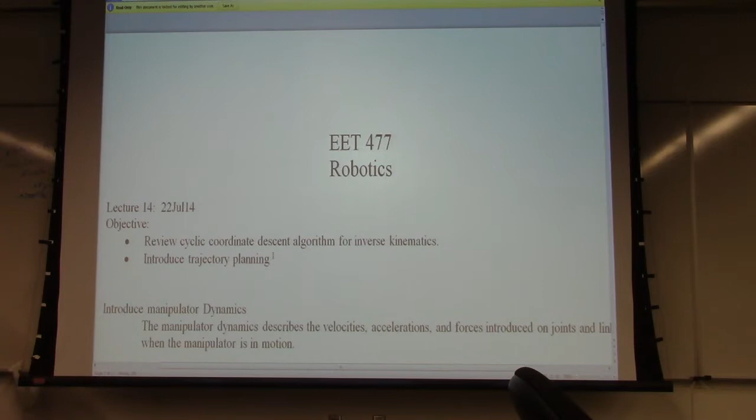I've already done that. So what we're going to do is update the objectives. Today we're going to go through and look at the dynamics of our system, and in introducing our dynamics we need to kind of have an idea of what we're talking about. Anytime we're talking about the dynamics, we're looking at the manipulator in motion. We've already kind of seen this in the second part of Lab 4 when we were planning that motion from point A to point B. That was a dynamic behavior of the robot.

If we think about it, what do we have on that end effector, or on any of the joints or segments? Obviously we have motion, and therefore, since we have motion, we have velocities, accelerations, and in a physical system, forces. Okay, and those are the 3 primary things we're interested in when considering the dynamics. We're going to be looking at the velocities, accelerations, and forces associated with this. That's something we haven't looked at at all up until now, because kinematics is all about looking at the state of the system without consideration to the forces that cause that behavior to occur.

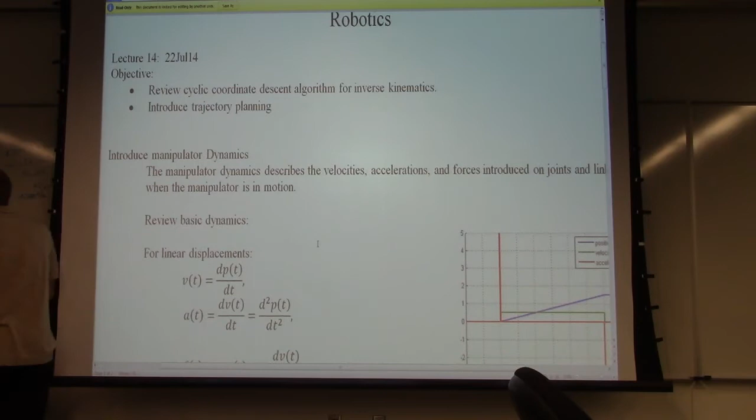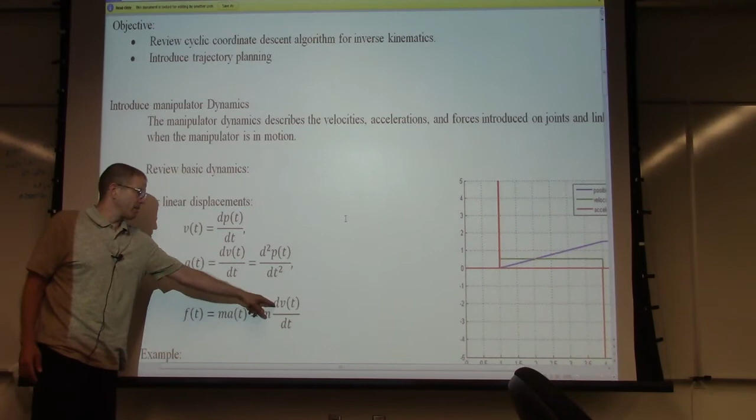Okay? So if you recall from your physics class, I'm not quite sure where everyone is, we can say a couple things. We can say that velocity is nothing more than the change in position over some time interval. We can say that acceleration is nothing more than change in velocity over some time interval, which happens to be the second derivative of position, but that's something that I'll leave for your physics class. And finally, that force is nothing more than mass times acceleration, which can be expressed, as it frequently is, as mass times the derivative of the velocity with respect to time.

Okay. Let's see, where does this come in? This is used for kinetic energy, isn't it? Because when we go through and integrate this term, we end up with 1/2 mv squared, which is the equation for kinetic energy. Okay, so this is the form that you'll often use when you're deriving kinetic energy for a system.

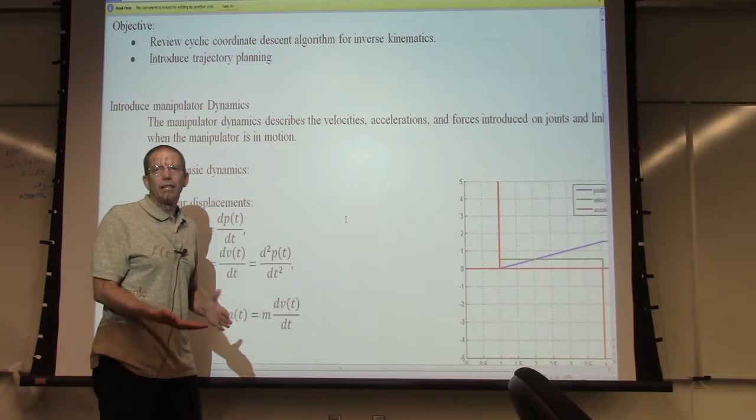Okay, so with this, as an example, let's say that we've got a segment on our robot, or for that matter, an end effector, that's starting at position 0 and moving linearly to a second position. You don't really care what that second position is. It's just moving in a single dimension at a constant rate for a specific time.

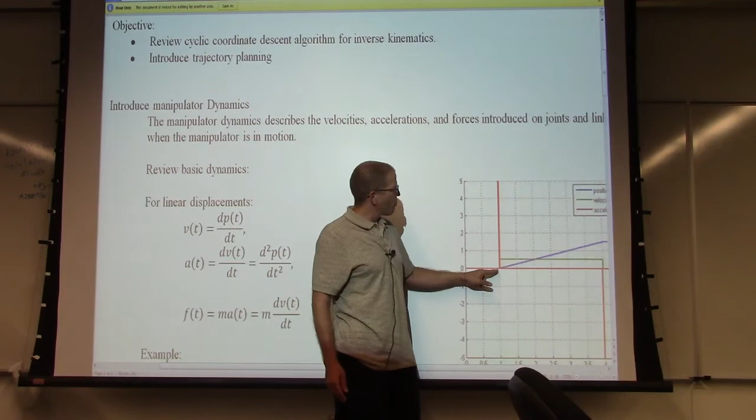Okay? If you notice, if we have a situation like that, what we see is a step response associated with the velocity. As soon as that movement starts, if it's moving nice and linearly, we have a step response because suddenly that segment or the end effector is in motion. It continues with a fixed velocity until it gets over here to the end, and at that point, suddenly we have no motion, so we have a step response as well.

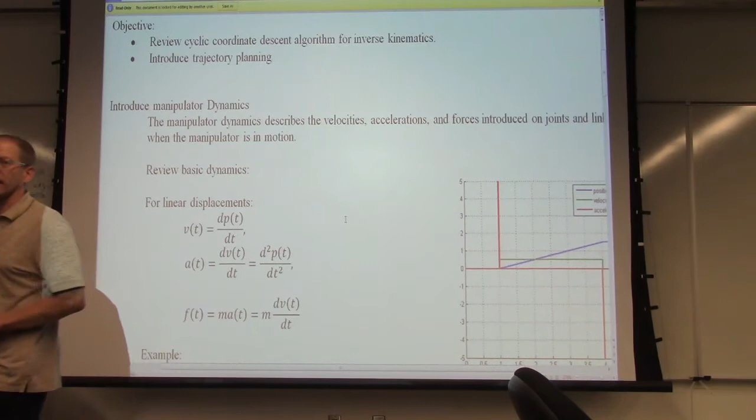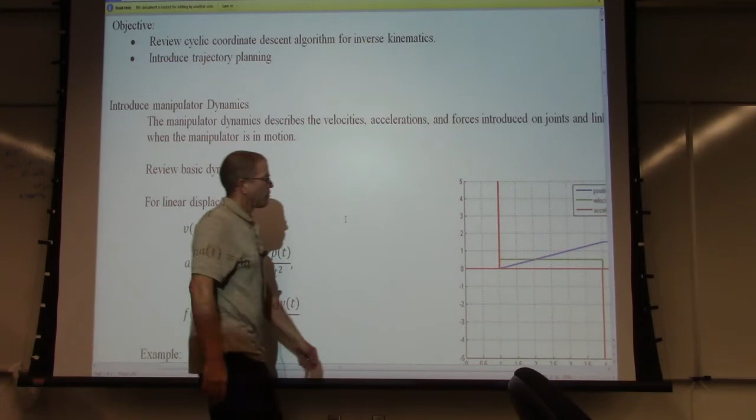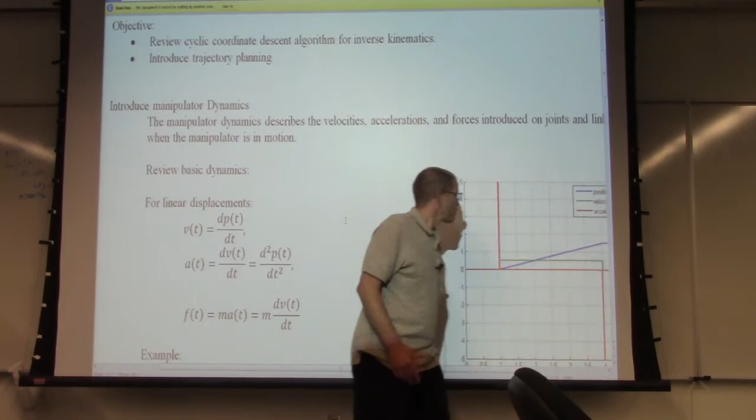Okay? What's the problem with a situation like that? Does that truly represent a physical system? It can't. Why? Well, the red curve is our acceleration. You notice here, when there is no motion, there's no acceleration. Here, when the velocity is constant, there's no acceleration. And similarly over here, no motion, no acceleration. But what happens on these edges? It attempts to head off to infinity.

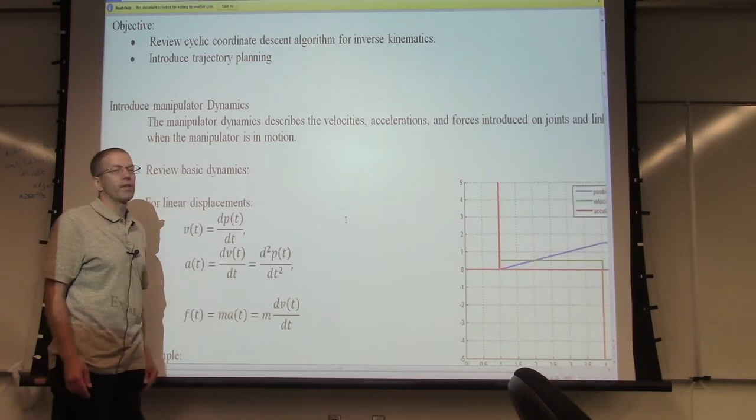Since force is equal to mass times acceleration, how much force is necessary to initiate that movement? Near infinite, right? So this isn't possible. Even though that would be our desired behavior, we can't achieve that. That means that if we want that manipulator to move, we can't just suddenly apply a specific torque or a specific step sequence to a joint.

Okay? What we need to do is start it off nice and gradually so that when we run up the board here,

I never checked to see if the thing was focusing. Let's hope it is. Seems to be.

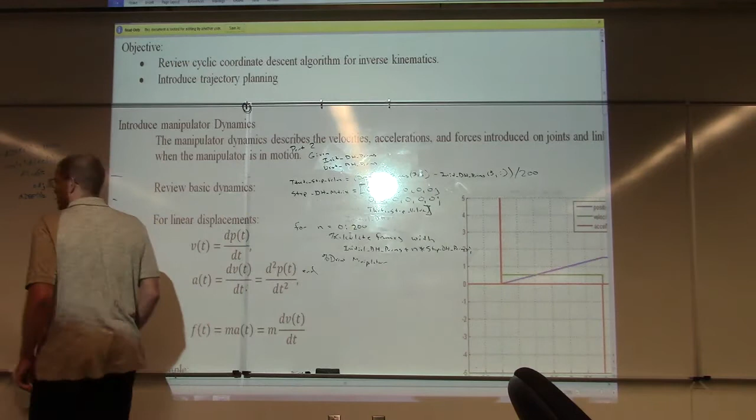Okay. So what we would then need to do, and I'll zoom in on the little graph. Okay. We would have to come along here, and instead of immediately just starting to move that manipulator, we would have to come up with a nice gradual start on that joint movement. And as we near the terminal point, we would want to have a nice, easy transition to that point.

Okay? What's that going to do then for our velocity and our accelerations? Smooth it out. Essentially what we're doing is we're running each of these functions through a low-pass filter. We saw in 313 and 324 that everything in life is about high-pass filters and low-pass filters. Everything. So what we would see then is that our velocity function would end up looking something like this. It's going to come up here and something like that.

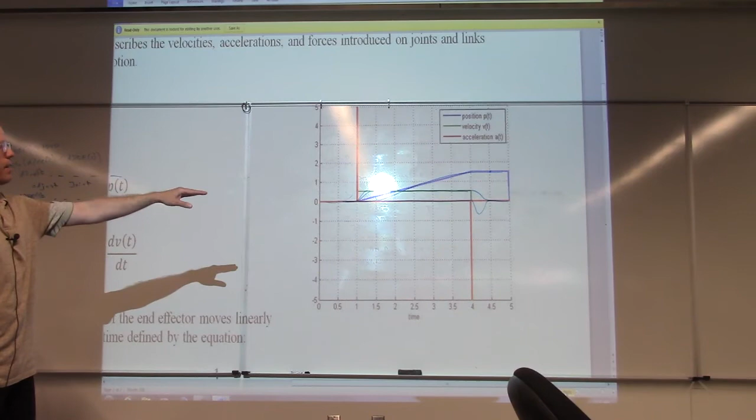What's happening in here? The momentum has been established, and therefore, in this region here, there's no force associated with that. We have momentum in play. It is allowing the object to move from point A to point B, and after it gets to the end, then we need a counter force to stop that. Are we just assuming perfect conditions on all this? Oh yeah, absolutely. So, okay, what does this mean for us?

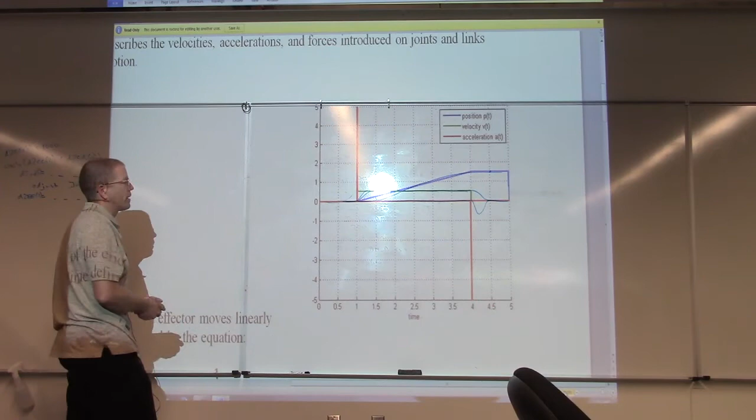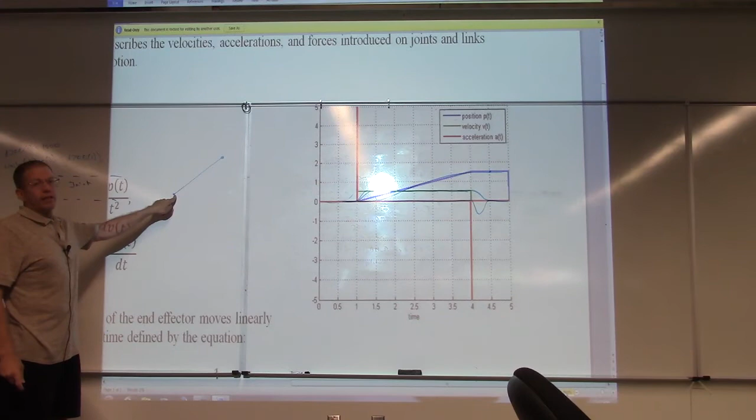If we have a point-to-point movement, not a real problem, right? Because if we have, say, point A here and point B here, I have no problem at all gradually increasing the velocity until we have our running velocity here, and then gradually decreasing our velocity until we're back at zero here. Okay, it's not an issue. You guys agree with that?

You notice that I kind of abandoned the note thing. I guess not, I still have notes on the board, so, the typing thing of the notes. I'm trying a few different things this summer since you guys are kind of guinea pigs and captive, so.

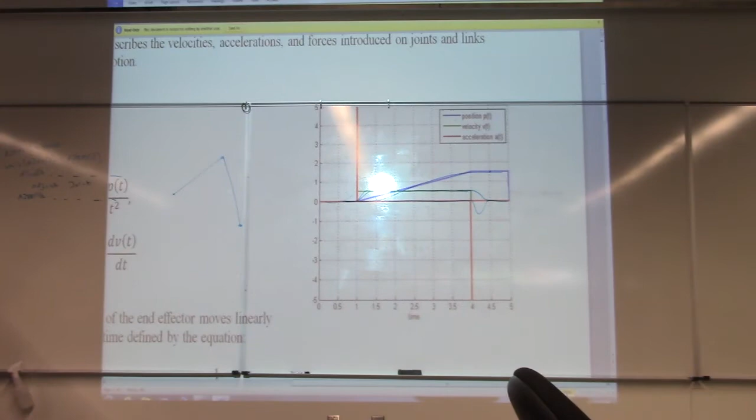But let's say that we have a planned motion. What are we going to find ourselves probably doing? By the way, what can you say the goal of a planned motion on a manipulator probably is? Generally, the goal is to get you from here to here as quickly as possible. What would be the point of maybe having this intermediate step here? Go around something. To go around something, right? Or maybe this happens to represent the path of a weld or something like that that you need to perform, okay?

But if we want to get from point A to point C as quickly as possible, what we probably don't want to do is speed up, decelerate, speed up, and decelerate. We probably want to speed up here and decelerate here and stop here, okay? That makes sense? Now, this is kind of falling back on that high school physics teacher approach where I don't distinguish between acceleration and the vector that represents it. Because we know that anytime we're changing direction, we're also accelerating. So what I'm talking about here is the magnitude of our acceleration, not necessarily the acceleration itself, okay?

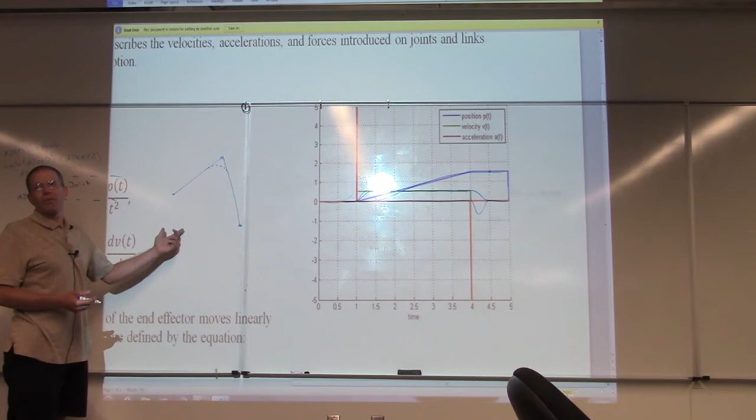Let's say that we definitely did want to achieve this point. Overshoot it. Yeah, we did definitely overshoot it. And this would represent what kind of system? Continuous motion. Well, a continuous motion, but would that be over dampened or under dampened? You mean like Chebyshev versus... I mean, what we'd end up with is an underdamped system at that point because we'd be overshooting and that would result in oscillation.

So if we did go ahead and achieve that point, then we'd have to go through and overshoot it. And more than likely when we did so, if we had a perfect Chebyshev response, then it would dampen and settle right out. Let's see, there's Chebyshev response, there's Butterworth, and that's like the perfect one, the critically dampened response that we're looking for. The Chebyshev is the over dampened, or the under dampened. I can't remember now.

But anyhow, more than likely we would not be able to come up with this nice critically dampened behavior. We'd probably end up with oscillation as we went through and pursued that second path, and each subsequent path.

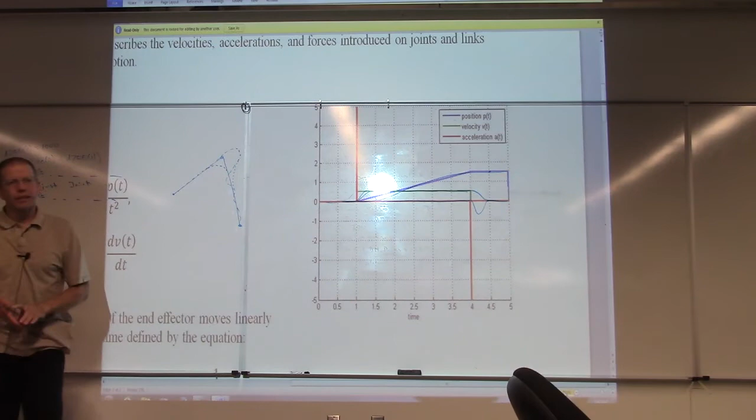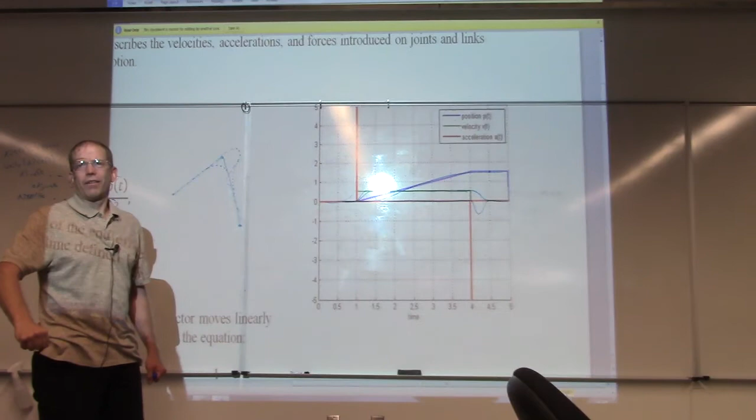Have any of you ever operated a forklift? Was yours a rear steer? And did you ever go out on wet pavement and spin it around, do a couple donuts real quick? Yeah. So I did that one time unintentionally. I went out to pick up a pallet and I started to crank it, and of course I turned. So I cranked it back and sure enough I ran myself right into an oscillating behavior. The only way I was able to get out of that was to stop, because as soon as that back end starts whipping back and forth, it's just hard to correct that behavior.

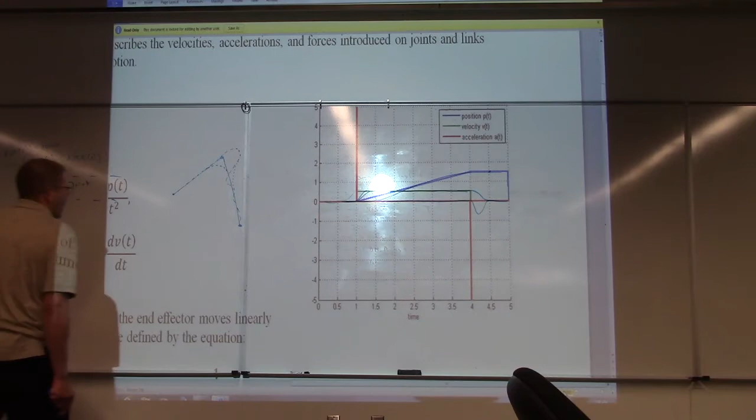Okay, so the other thing that I want to talk about here is the other big part of our dynamics consideration, and that is the torque that must be applied on the joints in order to hold it in a static position or cause motion to occur. The easier case, which is what we're going to focus on, is just holding a mass on the end effector in a fixed configuration, because I don't really want to get into superposition and considering the motion paths and everything else associated with this.

So let's talk about the torque real quick. Turns out that we finally have a use for that cross product that we talked about early on. The torque, tau, is equal to the position vector R cross the force that is being applied on that arm. The position vector R is associated with some location, and out here we have some force pointing off in some direction, and that force is causing a torque to occur on our fixed end.

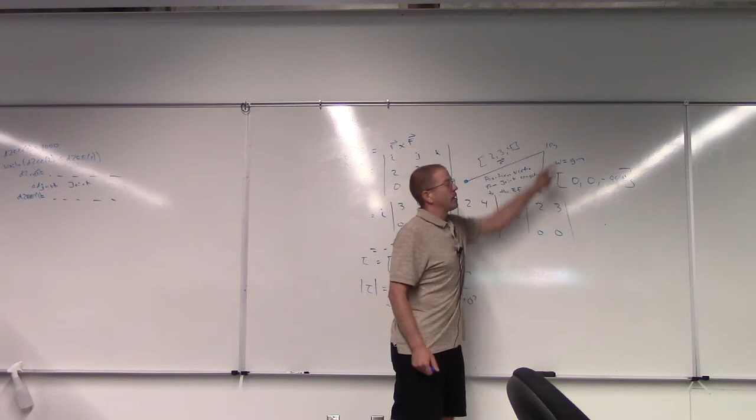Okay, so in this case, if the position vector is running out from a joint to the end effector, what are the different scenarios? Are we always going to see the position vector from the base frame to the end effector be the longest position vector? Generally you would expect it to be, but that's not always the case, right? That means it's entirely possible to have more torque on one of the joints further in the chain than on your base frame. So as an example, let's do a couple of things here. I'm going to erase this real quick.

And by the way, if you can figure out the angle of separation, it's not the law of cosines, that's wrong, you can use the magnitude formula for vectors. It's the magnitude of r times magnitude of f times sine of the angle between them. But for me, it's always easier to calculate the vector quantity and then find the length of that vector quantity. Okay.

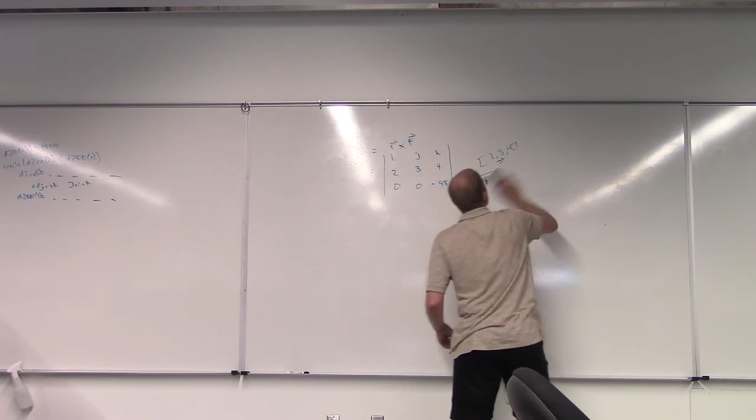So let's do a couple things real quick so that we can really start to consider this. Let's stick with the same 10 kilogram or 98 Newton weight at the end of that end effector. Our position vector R1, let's go with what we had before, gives us a position vector of 2, 3, 4, meaning that the magnitude of our torque was 353 Newton meters. The position vector from our second joint out, R2, looks like it's probably something like 2, 0, 0. You guys agree with that?

Why don't you go ahead and find the torque associated with the second segment real quick, and then we'll look at a situation where we don't necessarily always have more torque on the earlier joints. By the way, what would be a good configuration to determine the holding torque for each of these? Just as a matter of practice.

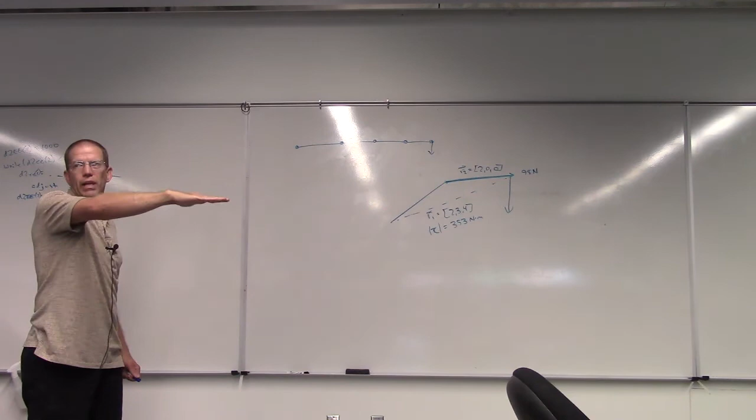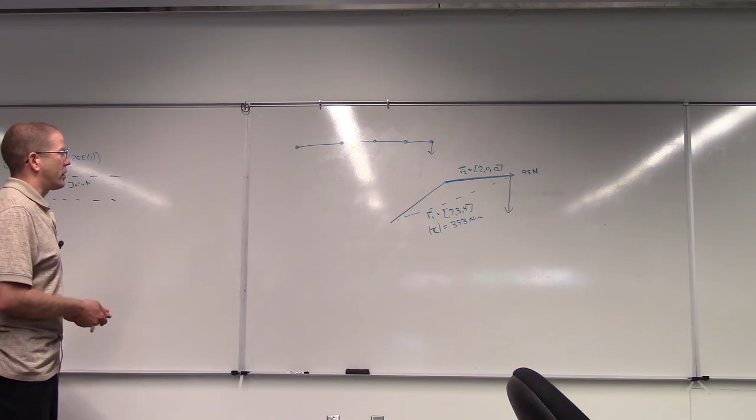Maybe if we extended those arm segments horizontally and applied a force at the end, we could progressively rate each of the torque specifications of those motors, okay? Again, this will provide us an idea of what the torque specifications will be, but it does not mean that we won't run into a situation where the initial joint doesn't have the most torque applied to it. But in general, going down a manipulator chain, you'll find the largest motor on the earlier joints, because of the torque specifications that go along with it.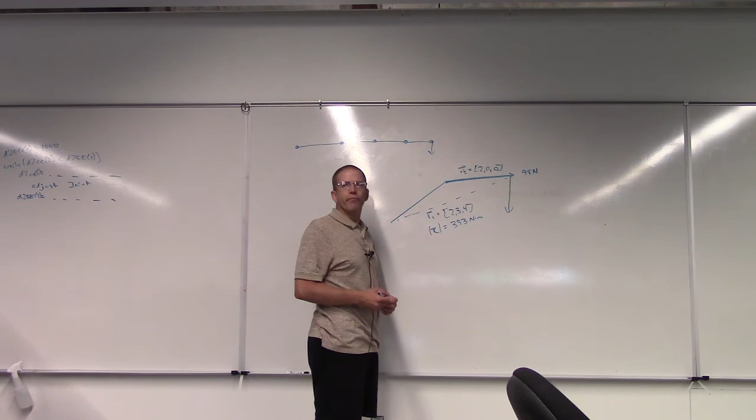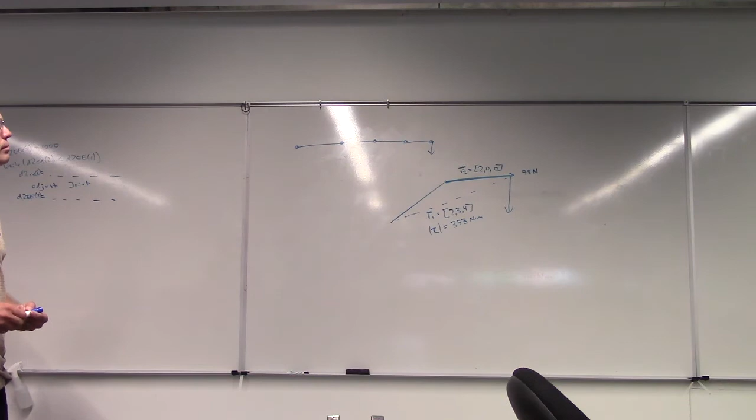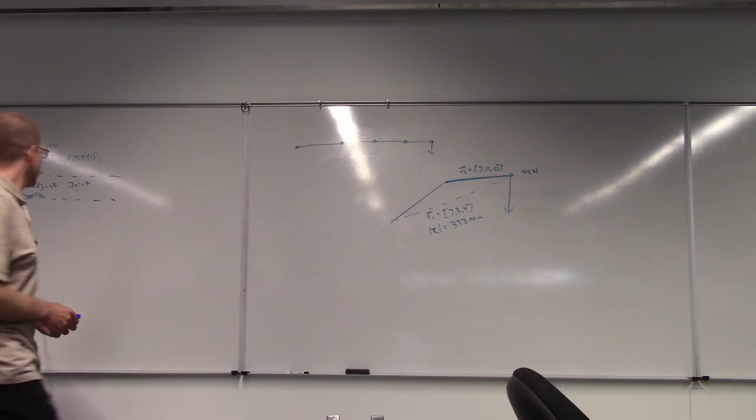Okay, so how much torque is being applied to the second joint? Let you guys do that real quick, and I'll go grab a few stepper motors so you can take a look at them.

Everything else is zero, except for the negative 1 and 6. Huh? This is a quiz, it's easy. Did you do it already? Did you get that to work out? Did you just get 3 and 3? A parentheses, a single parentheses. We spent a long time just finding a single parentheses that was off. I was closing the square root early, right here, so it only did the square root of that. Okay, 196. Most people were just kind of spacing out. Surprisingly, that should have taken none of us any real effort. Yeah, 196 minus 0 plus 0.

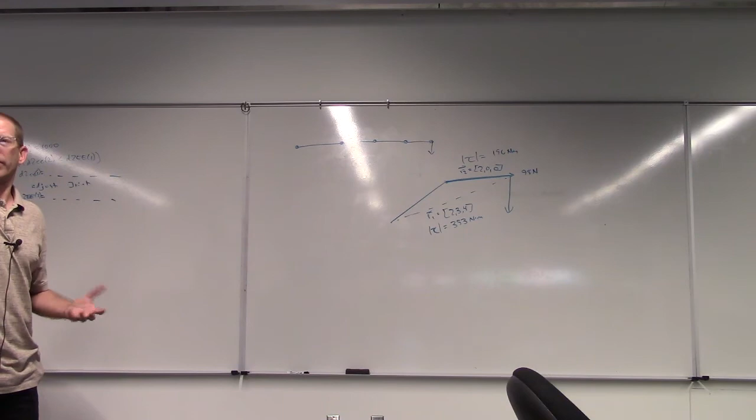Okay, so we see the magnitude of the torque on the second joint is just going to be 196 Newton meters. And so in this particular case, as we expect, the first joint is going to have the highest torque requirements, and the second is going to have a progressively lower torque requirement. But as I mentioned, this isn't always the case.

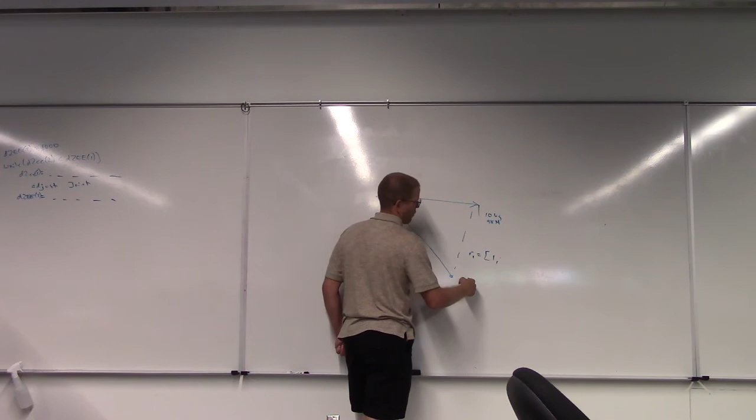If we have a situation where we have the manipulator set up something like this, and let me draw it more like this, so that we have that first segment as the longest segment. Let's say we're still dealing with the same 10 kilogram or 98 Newton weight hanging off the end there. But in the first case, we have a position vector R1 equal to, let's say, back 1 and up 5.

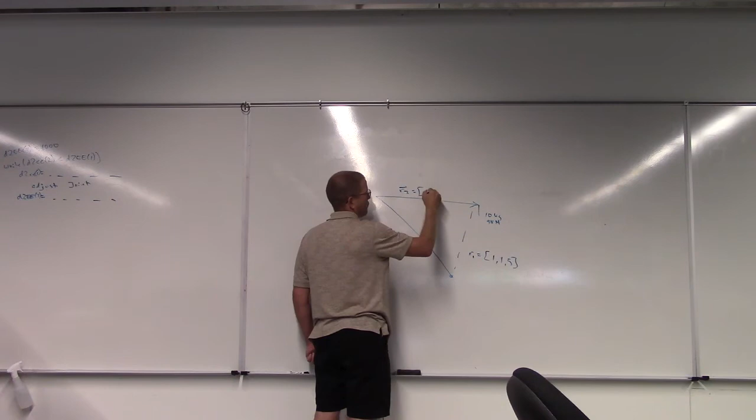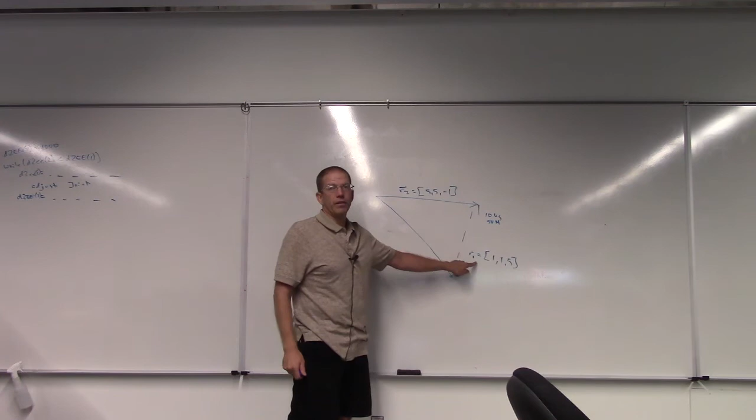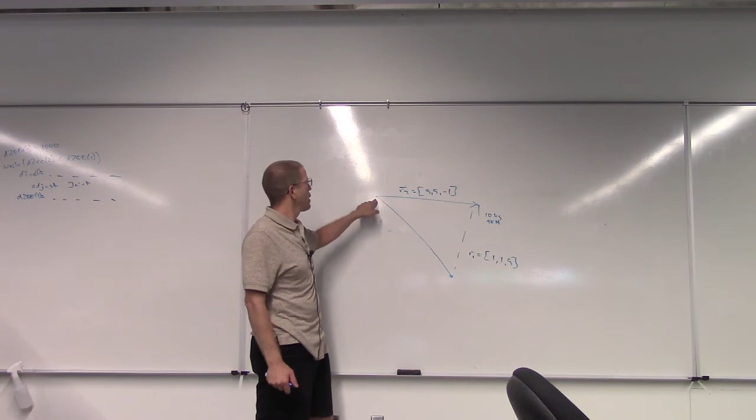In the second case, we have a position vector that's nearly horizontal, R2. Let's say it's going to have X and Y, maybe 5 and 5 and negative 1. In this case, we can see that the magnitude of R2 is definitely longer than the magnitude of R1, okay? And for this reason, the torque being applied to the second joint is much greater than that being applied to the first joint.

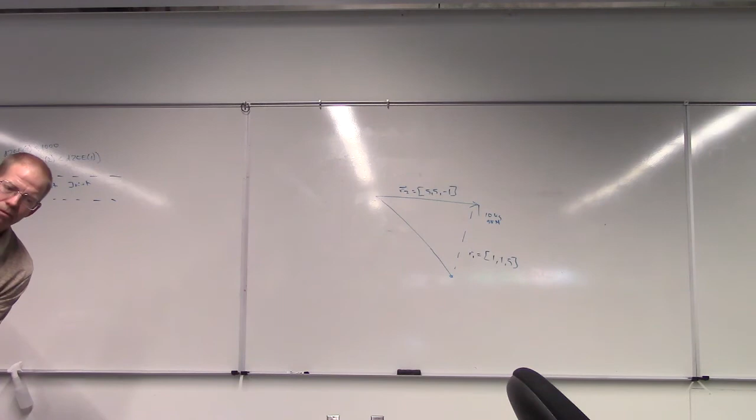So go ahead and figure out the torque. That way, when you run into these problems on the FE exam, you can do them real quick. So is this the type of question they legitimately ask about torque? Yeah, they absolutely do. So you go through and you have to calculate the torque, and then you need to figure out the magnitude of the torque.

So don't drop it on your toe.

By the way, if you notice on there, a typical stepper motor will tell you the stepper resolution, the torque, specifically the holding torque, and then the voltage and current specifications for the holding torque. That voltage and current specification is the power requirement to hold that motor in a fixed position, okay? Here in just a second, after we do this, we'll go through and talk about how you get a stepper to turn.

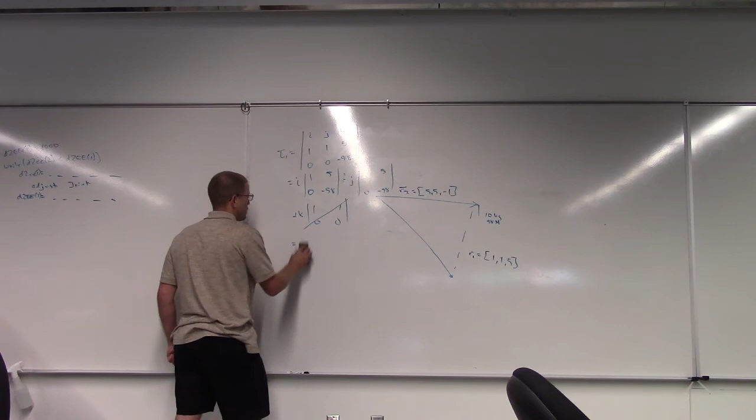You guys find the magnitude there. Okay, so. Oops.

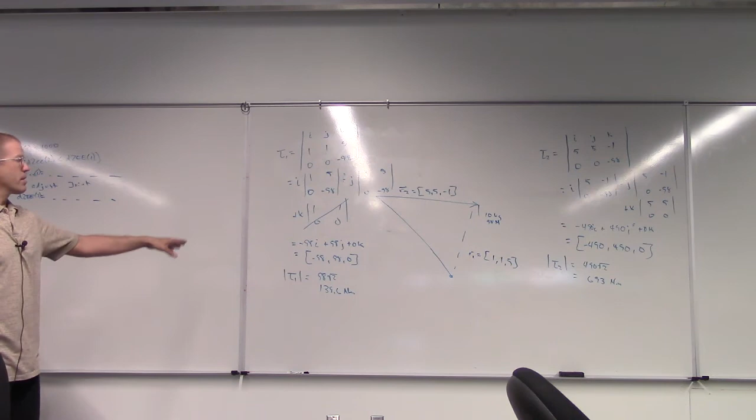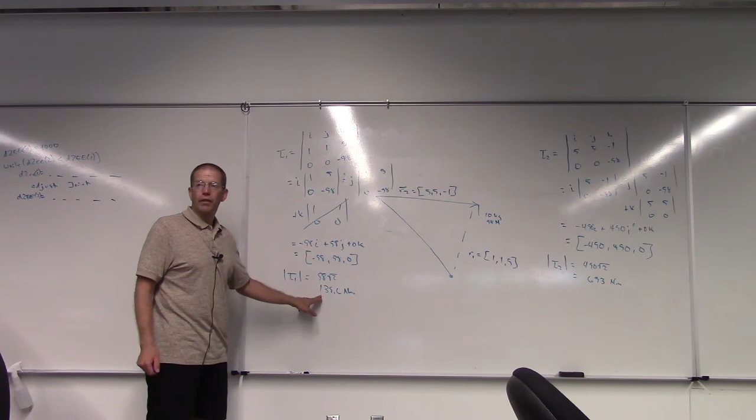If you did have to choose a stepper motor, you would never pick a 140 Newton meter stepper motor to satisfy this requirement, okay? You would probably choose 125% of that, which would be, what's that times 1.25? And keep in mind that this is just the torque specification for this particular configuration. It's 173, so 175. So you'd probably choose a 175 Newton meter motor there, if you just want to sustain this configuration. And then over here, same thing, multiply this by the same 125.

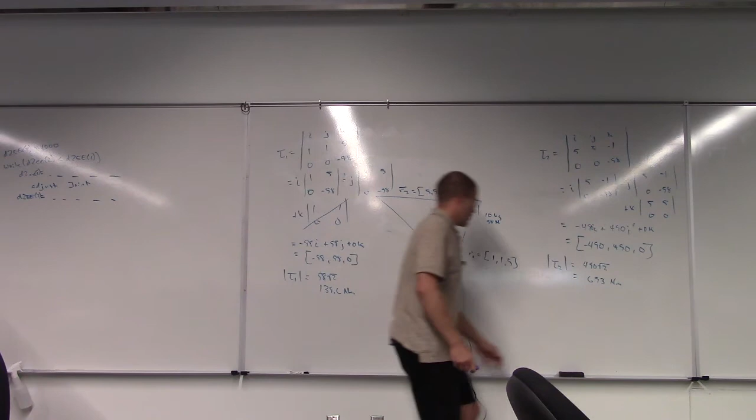When you're designing these, generally in order to actually choose the motors, you align all of your joints horizontally. That makes the calculations really nice and easy because ideally you'd be aligning them along either your x-axis or your y-axis, okay? Therefore, let's say that you do have a horizontally aligned manipulator, the math turns out super nice.

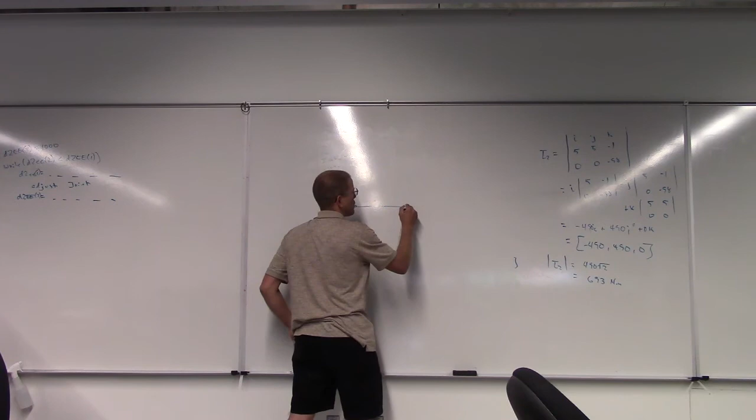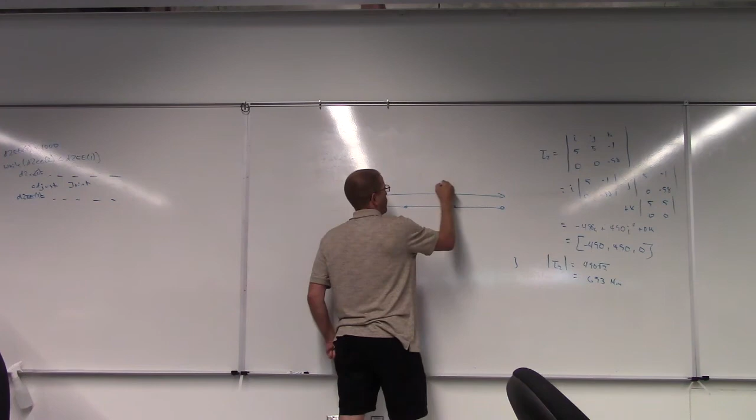Okay, let's say that this position vector, R1, is 2, 0, 0. Oops, that's not right. R1 is the distance to the end effector. So this might be 6, 0, 0, okay? This then would be R2: 4, 0, 0, and in this case, I'm just assuming that each segment has a length of 2 meters. And then finally, our third position vector is 2, 0, 0. Well, what do you notice about the cross product when you go through?

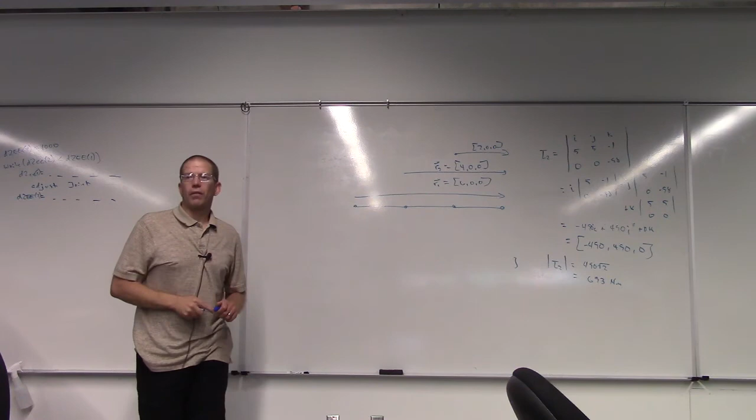2 of those determinants go to 0 because you have 2 zeros within your matrix. So ultimately, to find the magnitude, it would just be the 2 meters times the maximum payload on the end effector. Okay? In the case of our robot there, that Mitsubishi can handle, I think, 19 point, it's just shy of 20 kilograms. I can't remember quite. I mean, it's a pretty sizable load.

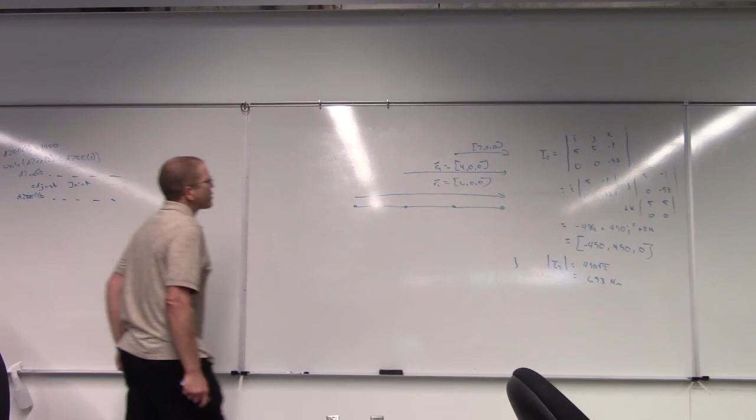So with that being the case, we could go through and determine what the motor specifications more than likely are just by measuring the length of each joint and determining what the current or the torque specifications are. Now notice the base joint is aligned vertically. So how would we determine the torque requirements on that base joint if it's aligned vertically instead of horizontally? Because if it's aligned vertically, we're not going to have to concern ourselves with the torque, specifically the holding torque.

In that case, what we'd have to do is take into consideration the shaft diameter and the bearing sizes and everything else, because when you're supporting this on a vertical shaft, or in part on a vertical shaft, you'd have to make sure that the bearings and the physical construction can handle that force that's being applied to them.

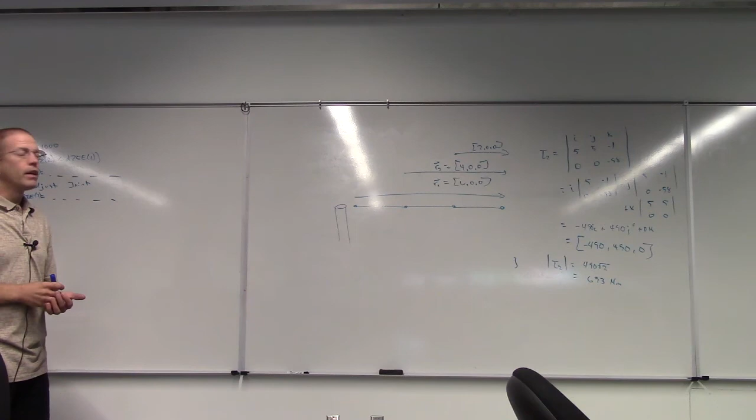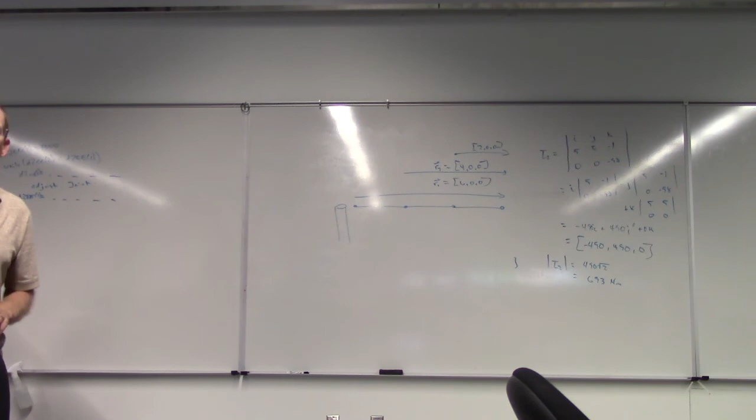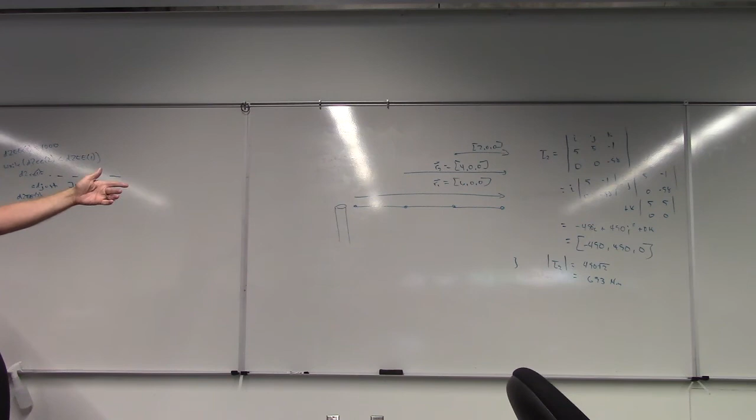Good. So I hope this gave you a good idea of how to look at that. I know that every so often someone wants to do a robotic type project for their senior project, but they never really have a good idea of how to start picking motors. Well, it really comes down to a very simple process like this where you come up with some static configuration to figure out the torque parameters that you need in order to pick your motors.

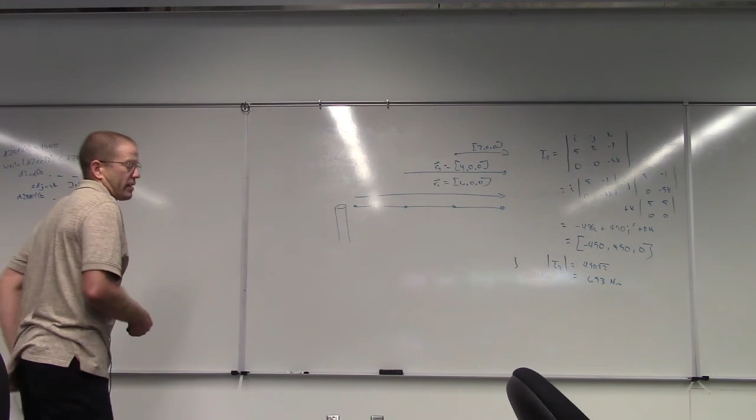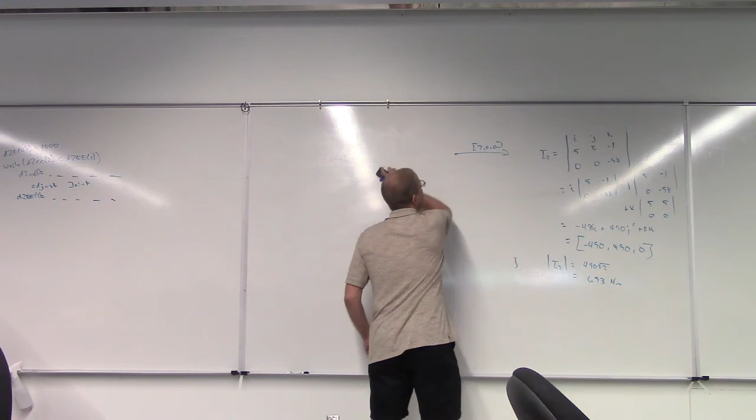So, good. The other thing is, you of course notice that there are 6 wires on this particular motor. In general, there's 2 different configurations for a stepper motor. There's what's known as a unipolar and a bipolar configuration. Okay, so one of 2 alternatives has this configuration. Generally, you see this as a 4-wire configuration. And let me just bring up the notes on this real quick.

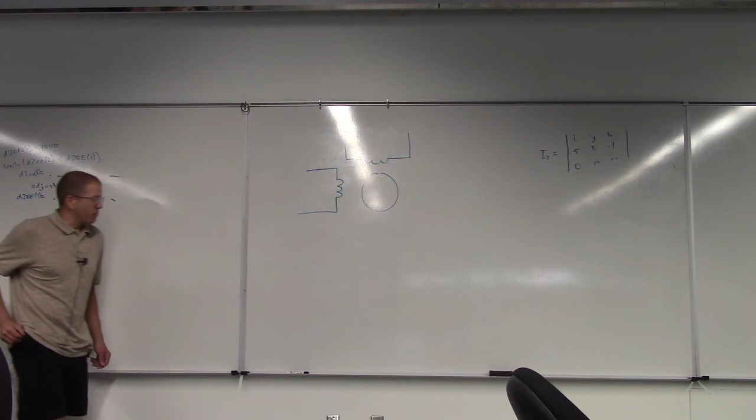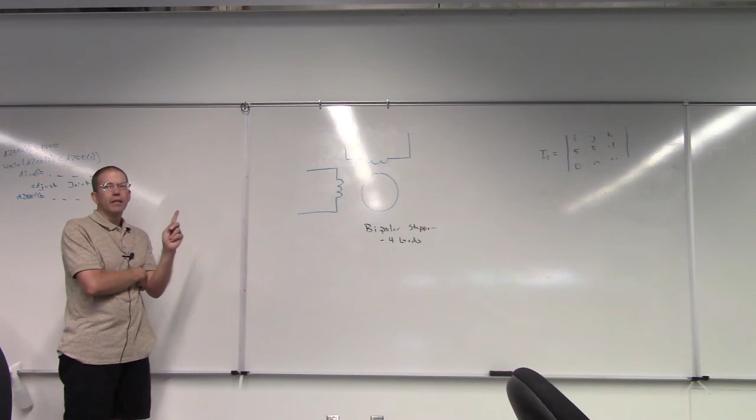Okay, so in this case, we have what's known as a bipolar stepper motor. Bipolar stepper motors are generally identified by 4 leads. Why do they refer to this as a bipolar stepper motor? Well, there's 2 inductors, but the bipolar behavior comes from the fact that we're going to be reversing the current through this inductor, therefore swapping the pole on that inductor, okay?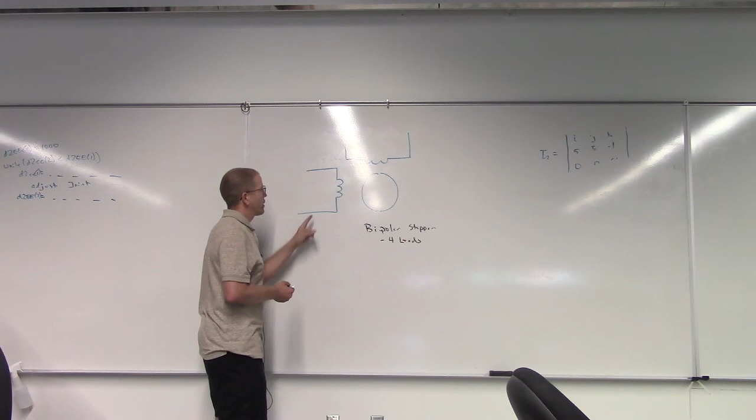So when you look at the step sequence for this particular motor, you will have a positive voltage and ground. Oh, geez. Okay, and then of course ground and ground. Then your positive voltage moves to here. I'll label these A1, A2, B1, and B2, so that we can create a timing diagram out of this. So in the next step, your positive voltage will move to A2, and ground will move to A1.

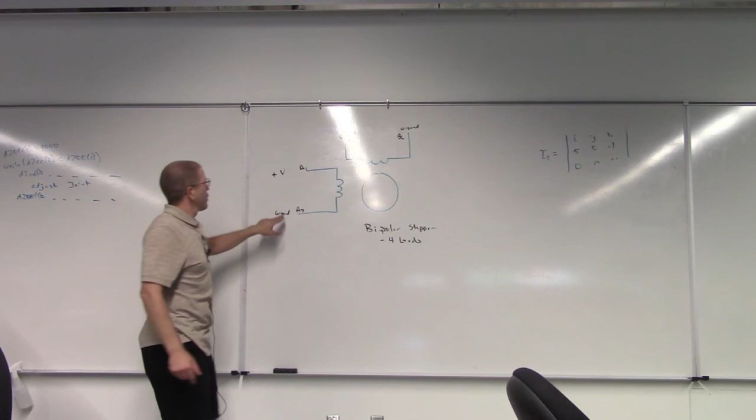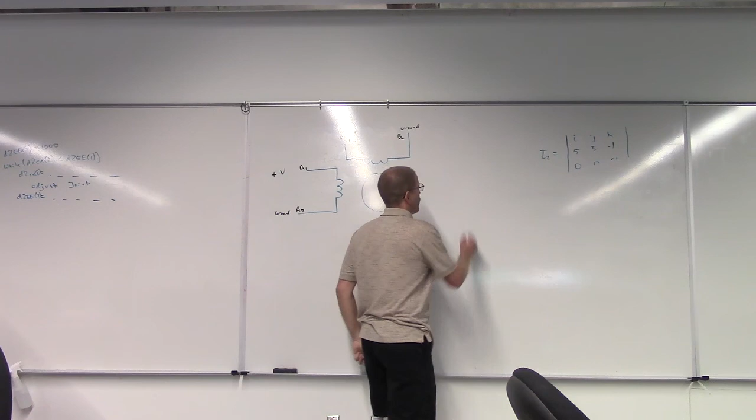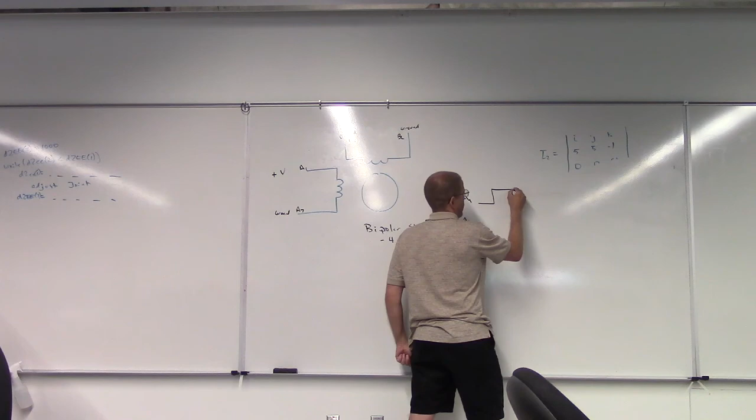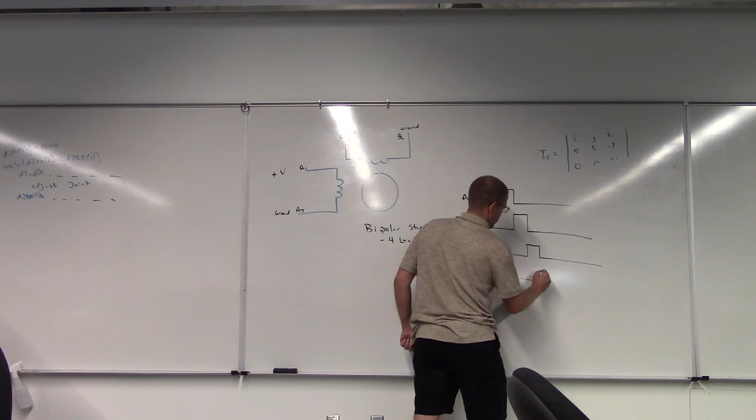Subsequently, your positive voltage will move to B1. Subsequently, your positive voltage will move to B2. So if you have A1, A2, B1, and B2, your timing diagrams are going to look something like this. And this will cause a north-facing pole in the first step, a south-facing pole in the second step, a north-facing pole in the third step, and a south-facing pole in the fourth step. This is referred to as full-step mode. There are also half-step and micro-step modes, but we're not going to talk about that.

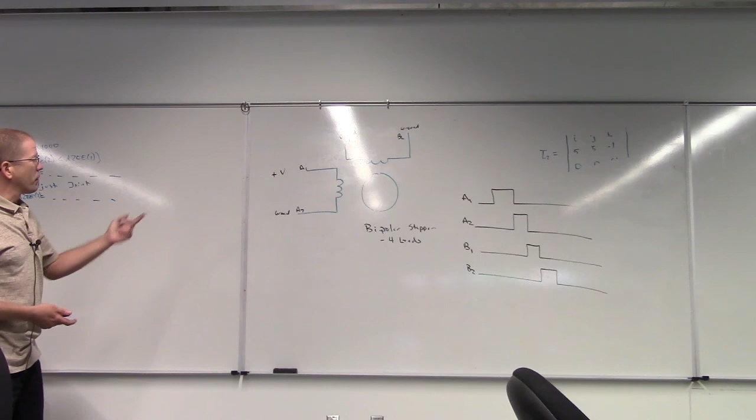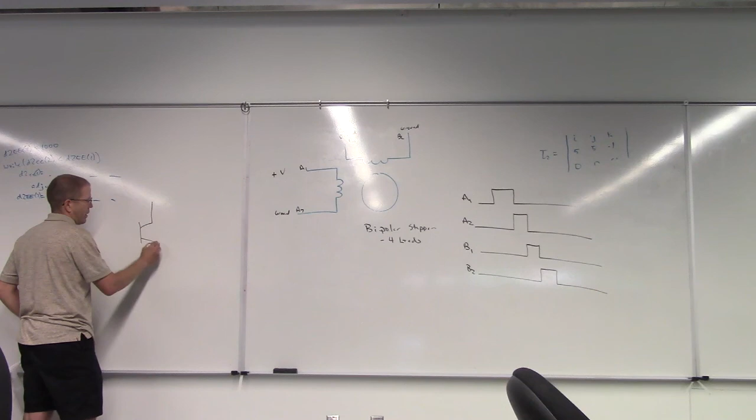One of the nice things that has been developed are stepper motor controllers. With this, we would use an H-bridge in order to control this. An H-bridge would just place each of these coils between, very literally, a transistor bridge. These are nothing more than electronic switches. This would be on when we want current flow one direction, and then vice versa: we turn this one off and this one on.